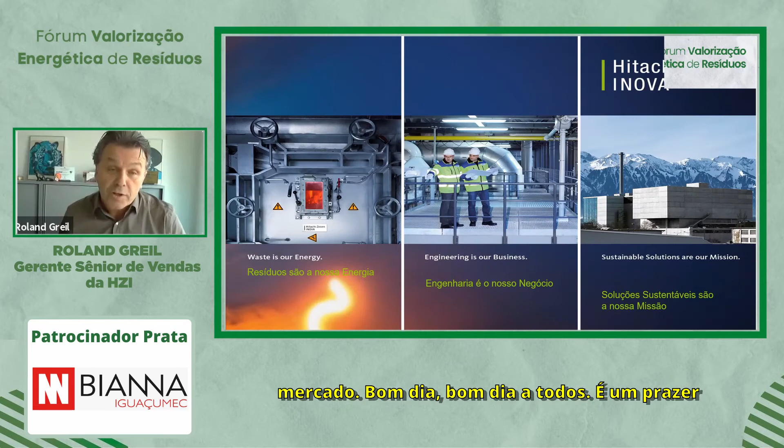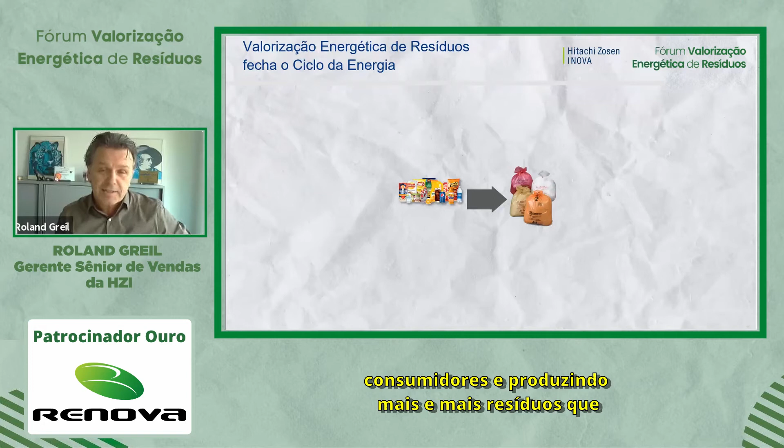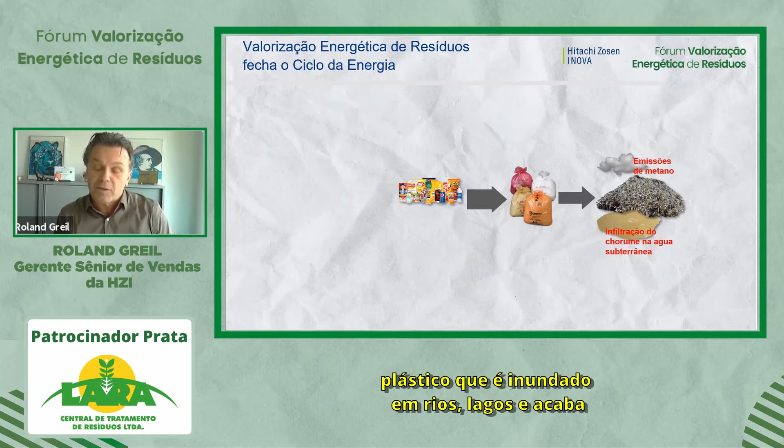I will talk about how we as HZI, Hitachi Zosen Inova, can contribute in the development of waste to energy in Brazil. We are all consumers and producing more and more waste that is polluting our environment, our drinking water, the air, plastic that is flooded into the rivers, lakes, and ends up in the ocean, and is also polluting our food. Raw material is used to produce those products and also to generate electricity.

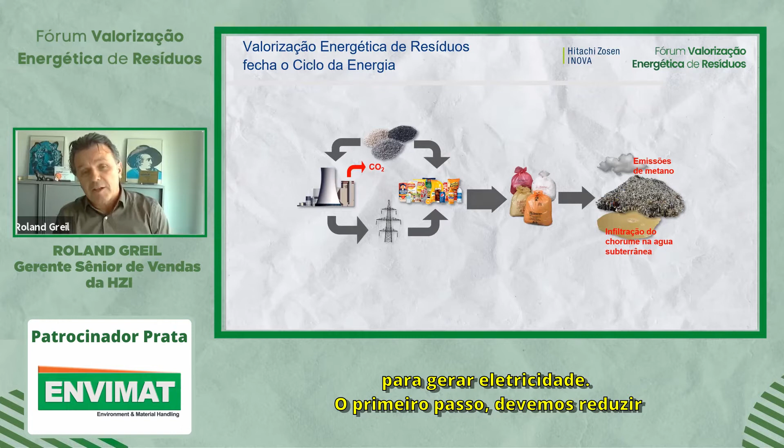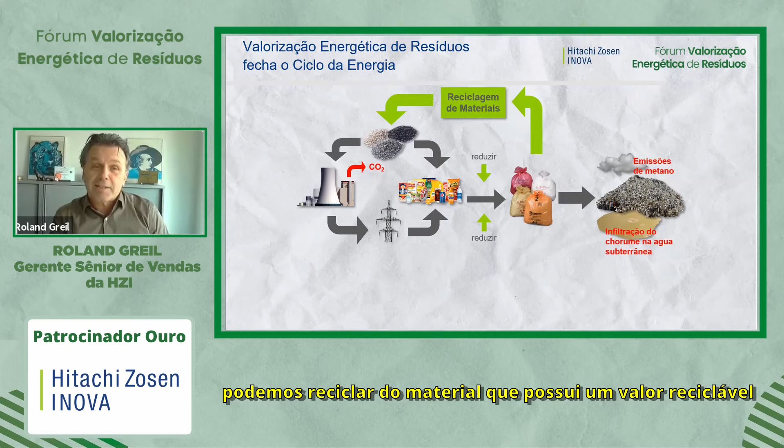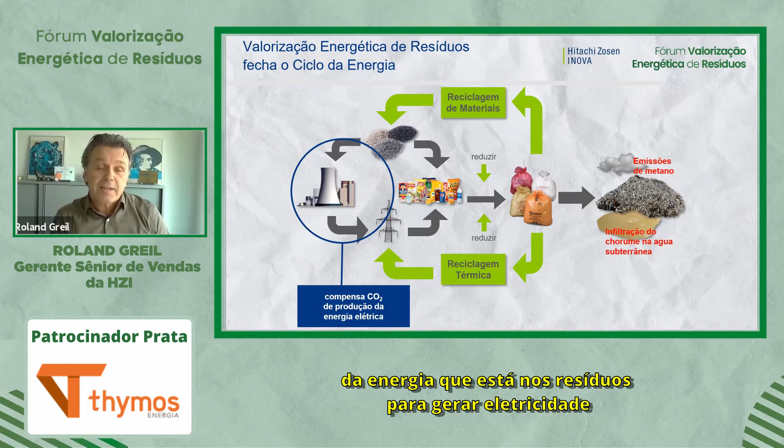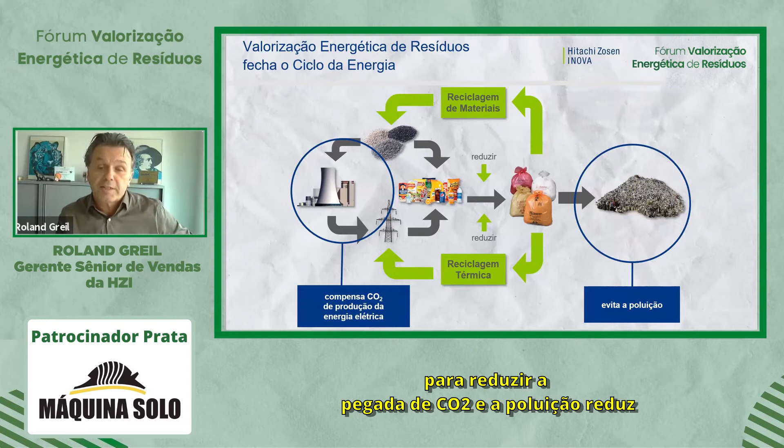In the first step, we should reduce the amount of waste that we are producing, and what we can recycle, material that has a value, shall be recycled and serve as a raw product to generate again electricity or produce the products. From what cannot be recycled, the energy shall be recovered, and that is the solution that we can provide to benefit from the energy that is in the waste to generate electricity, and to recover materials that cannot be recovered upfront from the waste. This helps to reduce CO2 footprint and reduces the pollution.

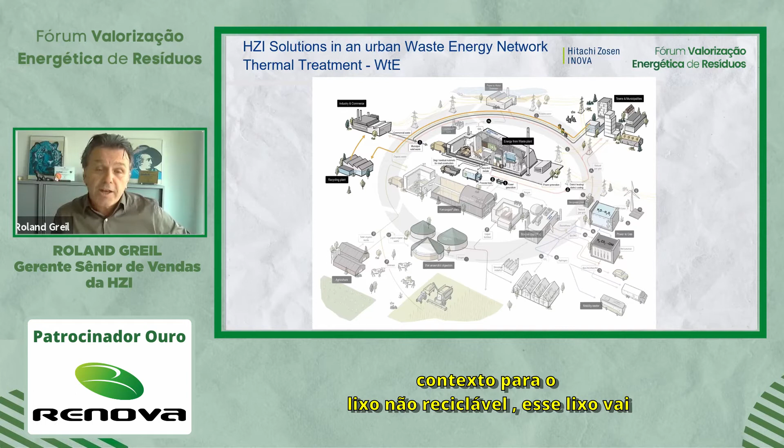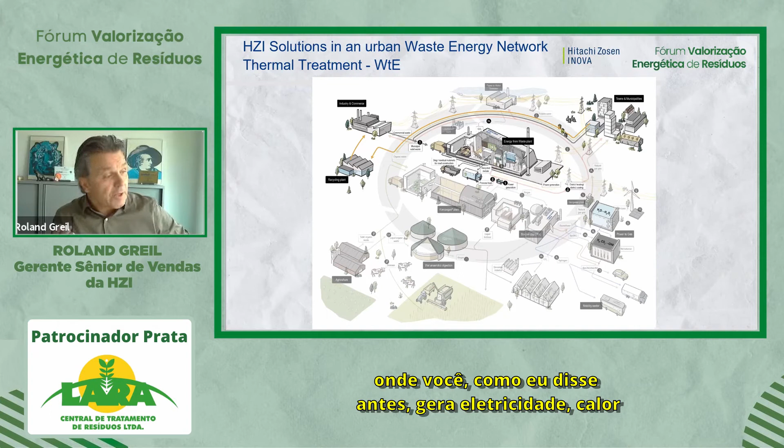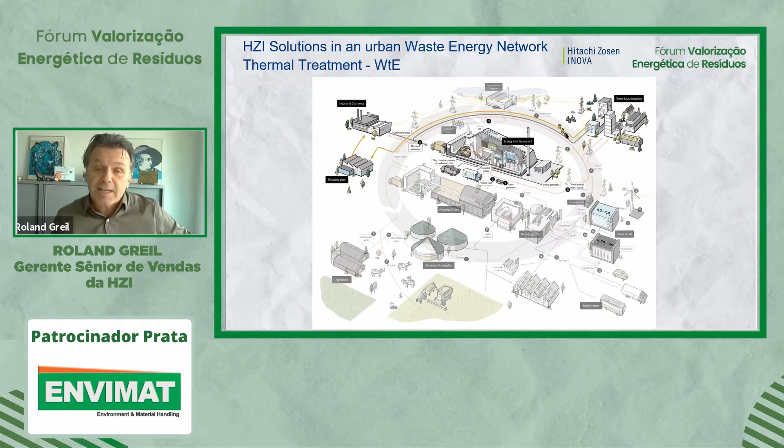What are HZI's solutions in this context? For the non-recyclable waste, this waste goes to waste to energy facilities, to the thermal treatment, where you, as I said before, generate electricity, heat or steam, process steam, or even cold, and recover materials that cannot be recovered upfront. Recyclable materials can go directly to the recycling industry.

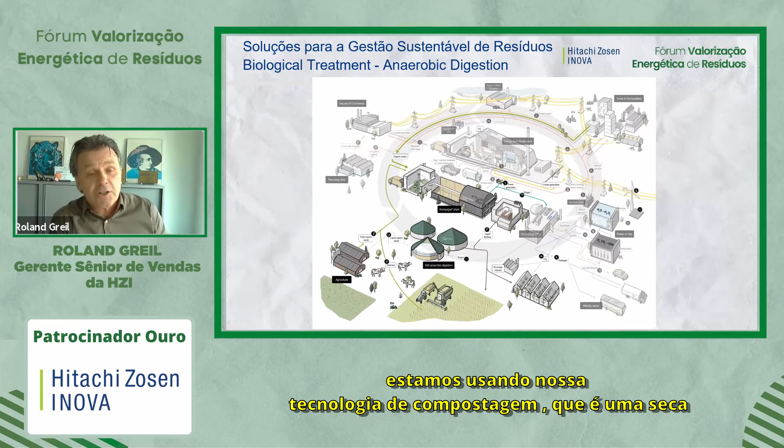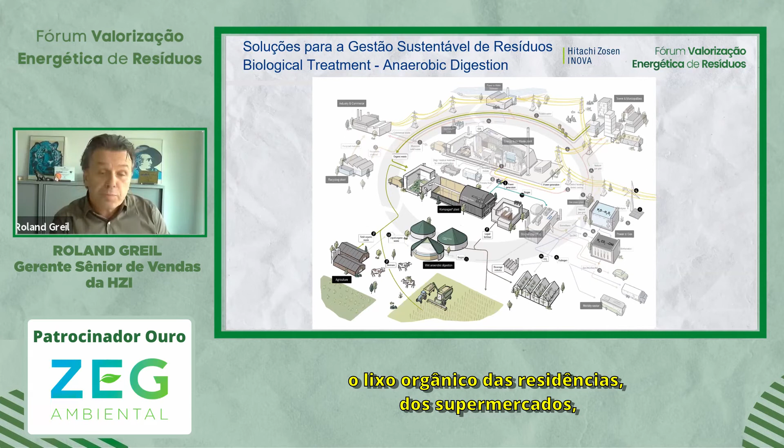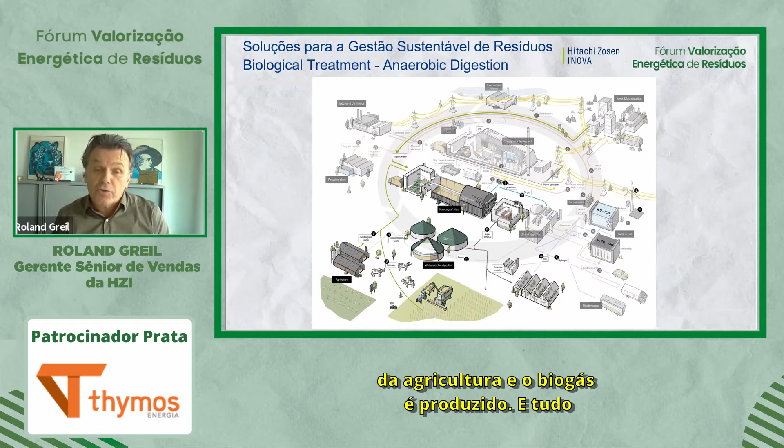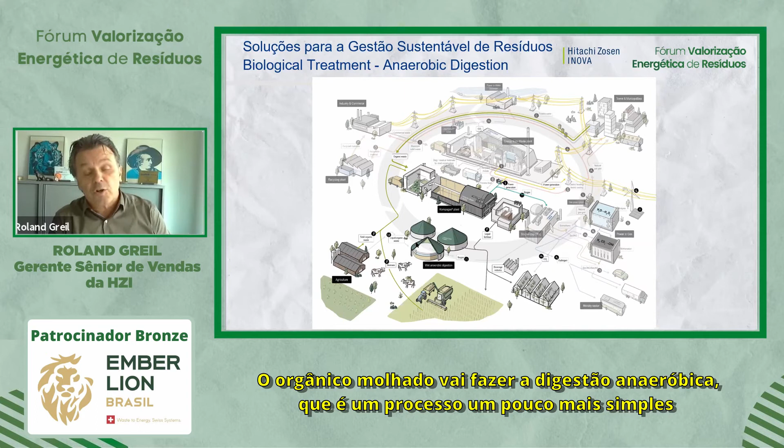For the organic waste, we are using our Kompogas technology, that is a dry anaerobic digestion. So where the green waste, the organic waste from households, from supermarkets, from markets, from the food industry is delivered, also from agriculture, biogas is produced, and also fertilizer, which then goes back to the agricultural industry, used in greenhouses or in gardening or in parks. Wet organic fraction is going to the wet anaerobic digestion, which is a bit more simple process actually.

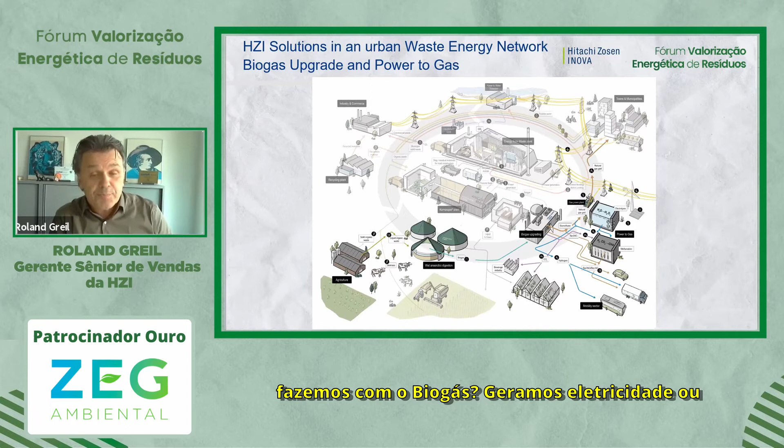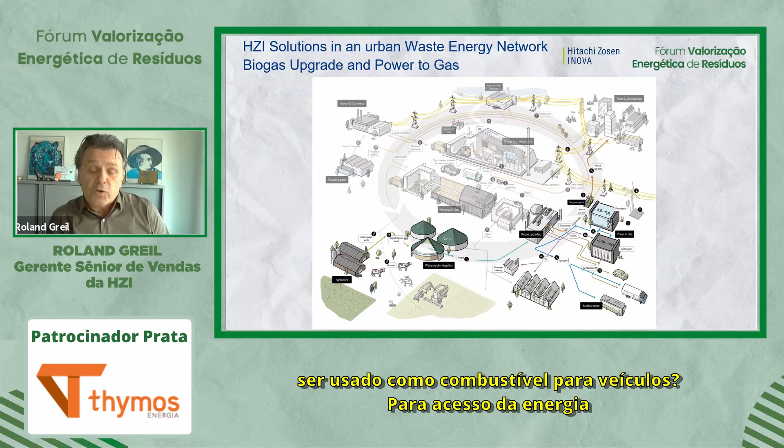What do we do with the biogas? We generate electricity as well, or we do the biogas upgrading to biomethane, which then can be used as a fuel for vehicles. And for the excess of energy that is produced from our plants or from other renewable sources, we use that in our power to gas solutions.

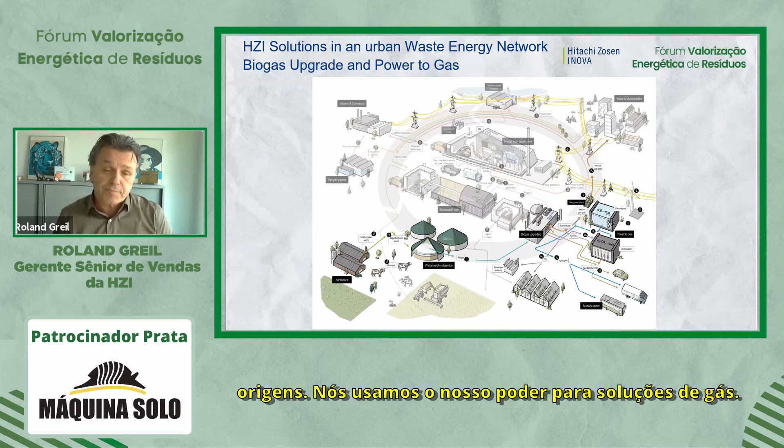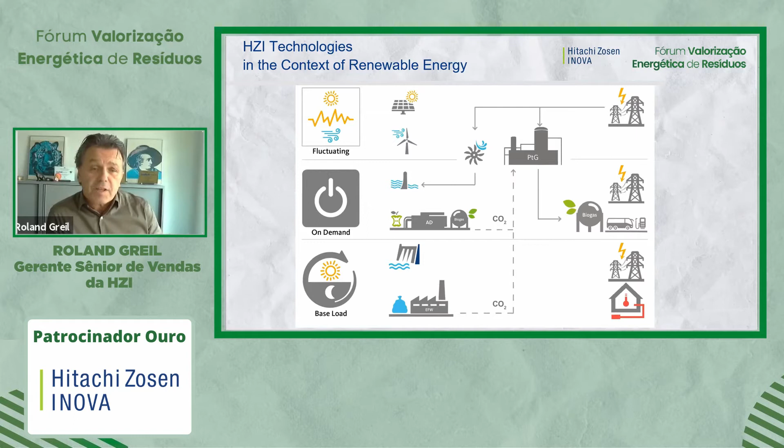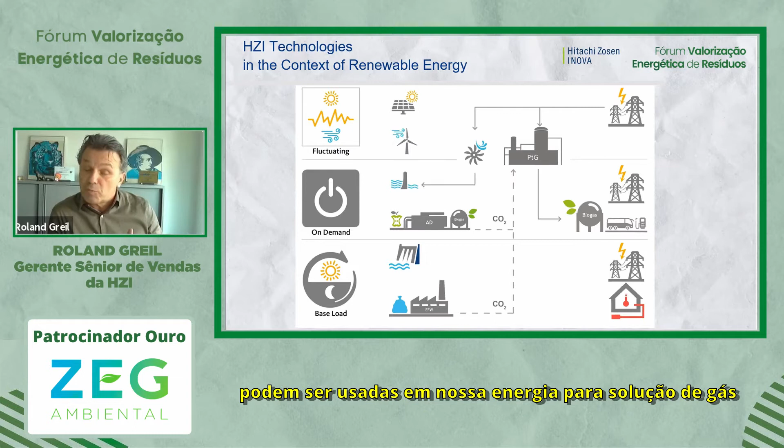What is the context of our solutions in renewable energy? So waste to energy is delivering the base load, constant production. AD, where you can store the gas, is an on-demand energy. And excess energy from fluctuating sources, renewable sources, can be used in our power to gas solutions to produce the gas, which can be stored and can be used when there is a demand.

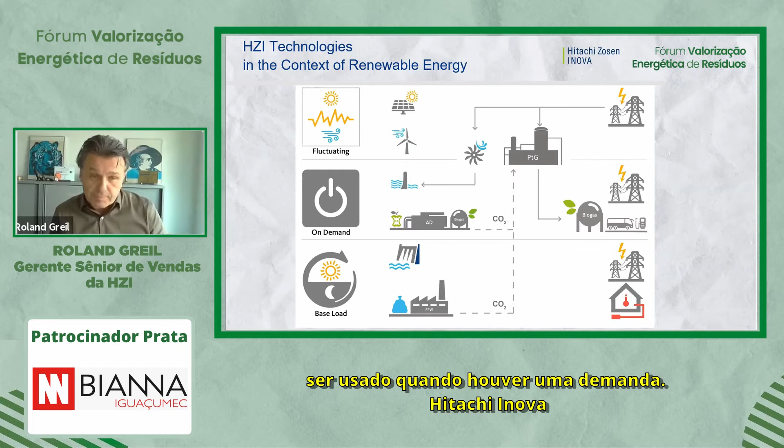Hitachi Zosen Inova is a company located in Switzerland. We have our headquarters here in Zurich. We are about 600 people here in Zurich, working for the solutions to deliver plants to our customers. We have other locations. In total, we are a bit more than 1,000 employees, and we belong since 10 years to our Japanese parent company, Hitachi Zosen Corporation, which used before our technology as a licensee to build plants in Japan and in other Asian markets.

As presented before, we have our proprietary technology for thermal treatment of solid wastes, anaerobic digestion of bio-waste, and biogas upgrade systems and power-to-gas systems. We don't only deliver and build plants, we also operate, maintain, and service the plants that we have delivered.

Our market share over the last 10 years was a bit above 27%. In the last years, even above 30% worldwide. That is both together, our parent company covering the Asian markets, and we basically covering the rest of the world. This is all counted on capacity installed.

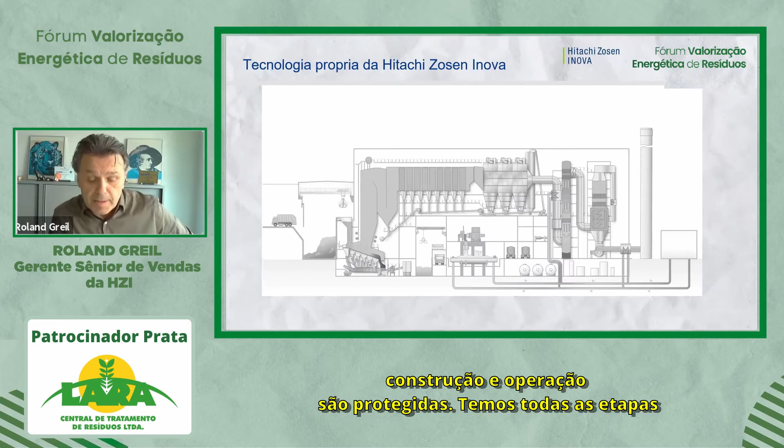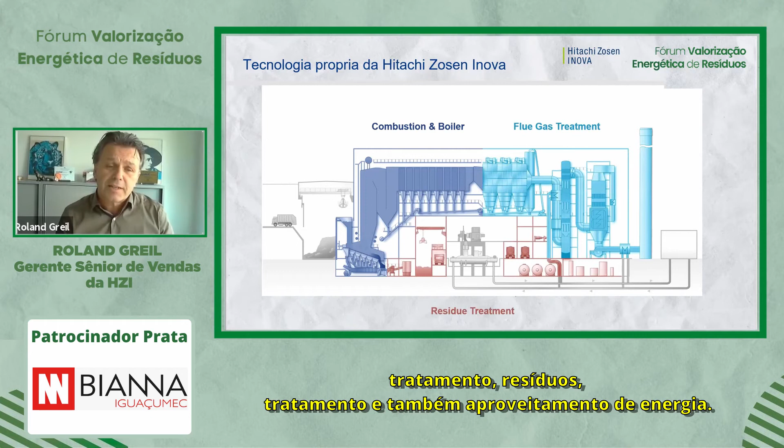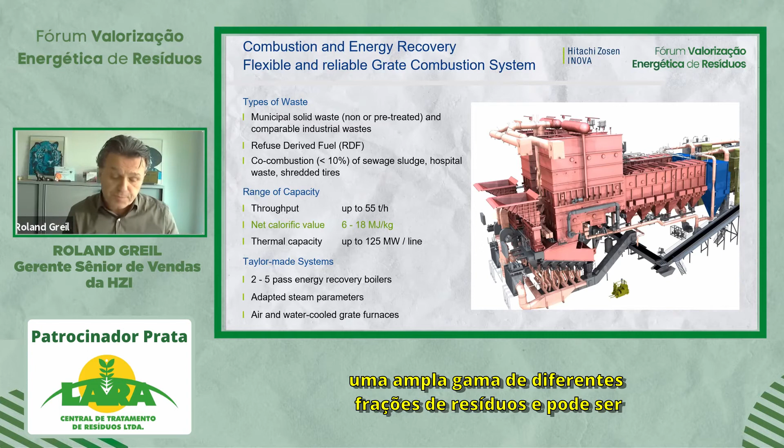We have all steps of the technology needed to build a complete plant. First section is the combustion boiler section, flue gas treatment, residue treatment, and also energy utilization. Our technology, and I focus today on waste to energy, not on the treatment of biological waste, on the treatment of the non-recyclable waste, is a grate combustion technology, which can take a wide range of different waste fractions and can be adapted to the local requirements and to local waste composition and specific situations.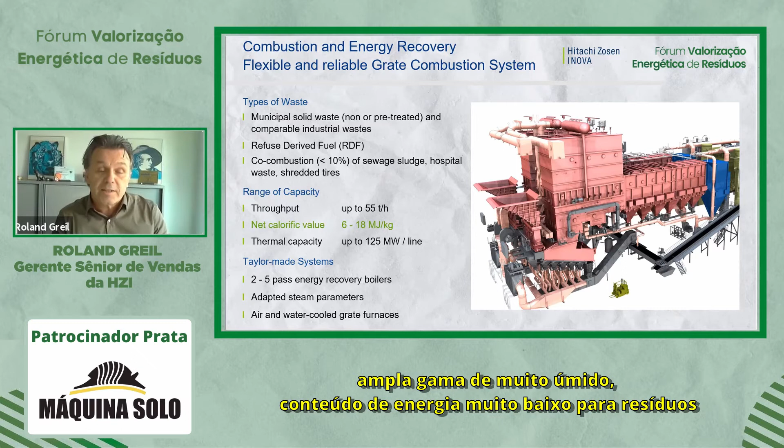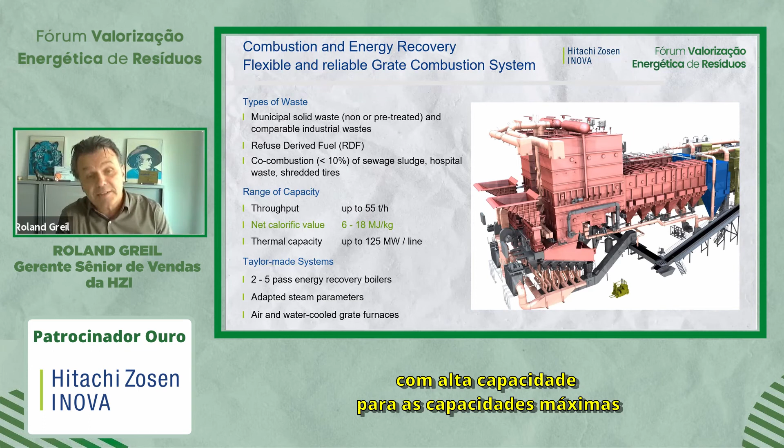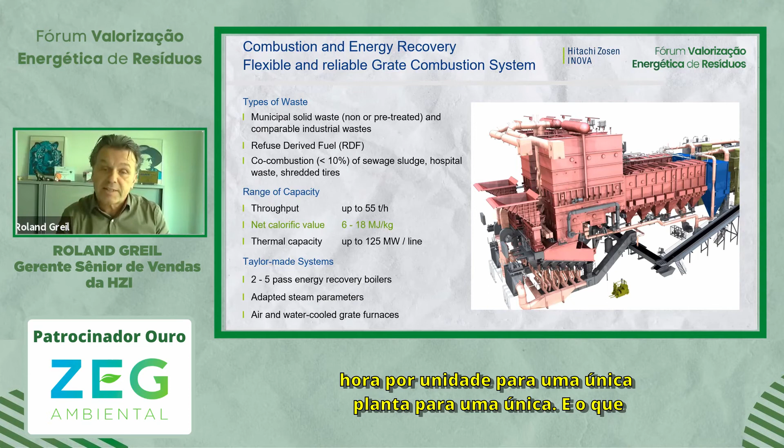You see here the range of net calorific heating values. This is a very wide range, from very wet waste with low energy content to waste with very high energy content. And we can deliver plants with high capacities. So the maximum capacities where we have executed projects is up to 55 tons per hour per unit for a single plant, for a single boiler, what you can see here on the picture. And the thermal capacity, that means fuel input, of 125 megawatts per line.

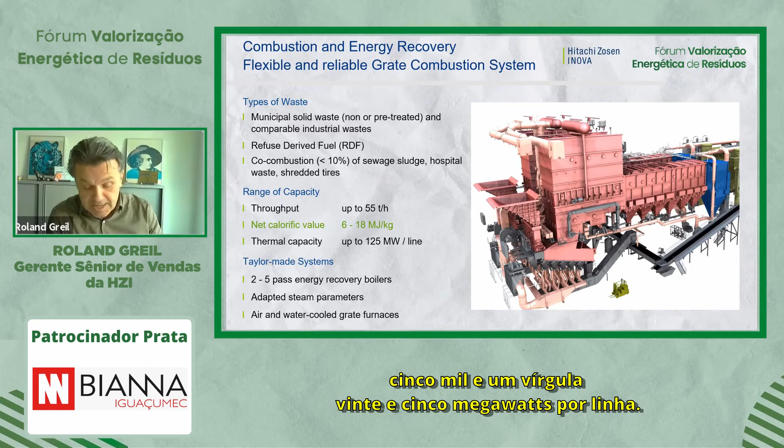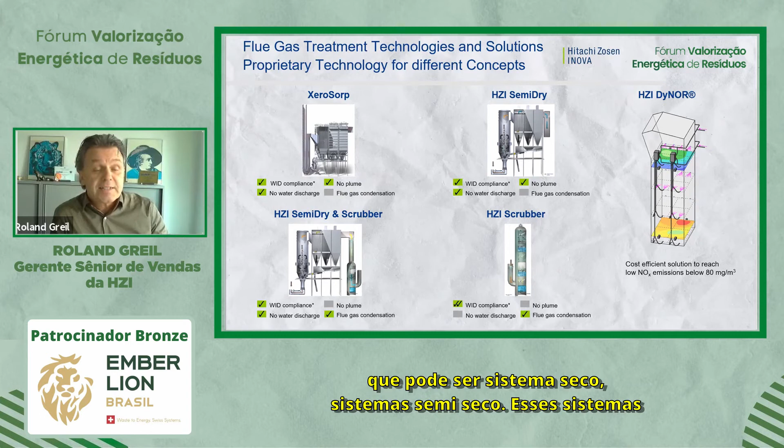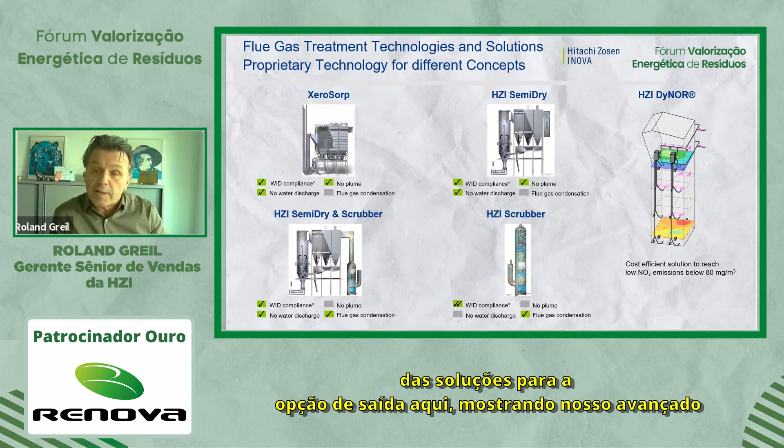We have also all kinds of flue gas treatment technologies, which can be dry systems, semi-dry systems, wet systems, or combinations of those systems, depending on the situation, the local requirements. And also solutions for NOx reduction. Here I'm showing our advanced DyNOR system, an advanced SNCR system that can reach very low NOx levels in a very simple way.

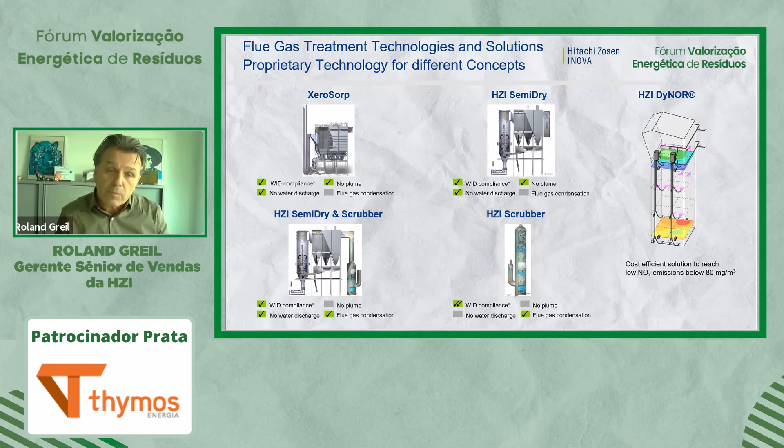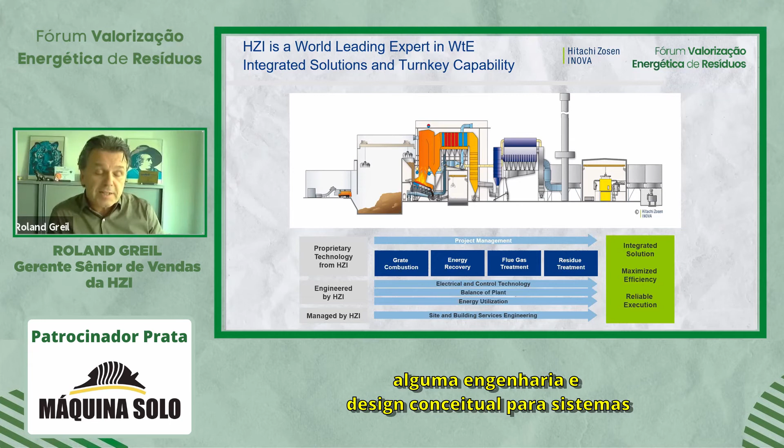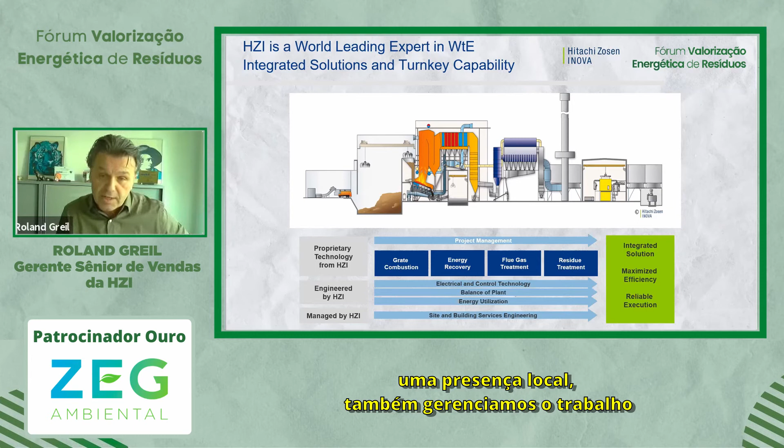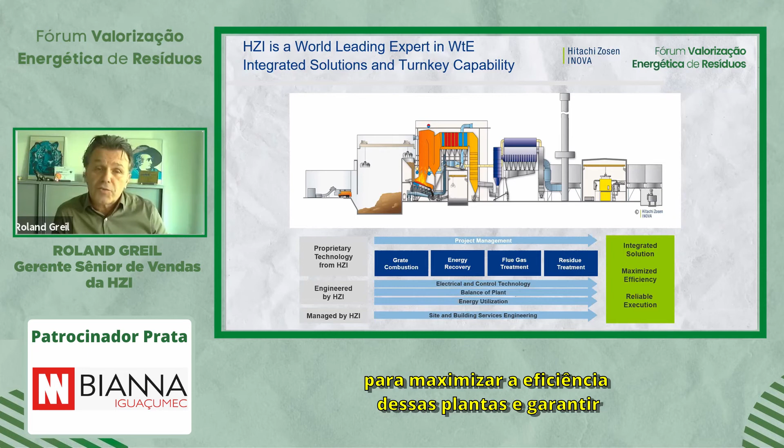We integrate the technologies that I've just presented, our proprietary technology, to deliver complete waste to energy facilities. And do some engineering and conceptual design for systems that are not our core technology, such as electrical installations, control system, balance of plant system, and a water steam cycle. And in markets where we have a local presence, we also manage civil work activities. Doing it in this way allows us to integrate those solutions in the best way, to maximize the efficiency of those plants and guarantee a reliable execution.

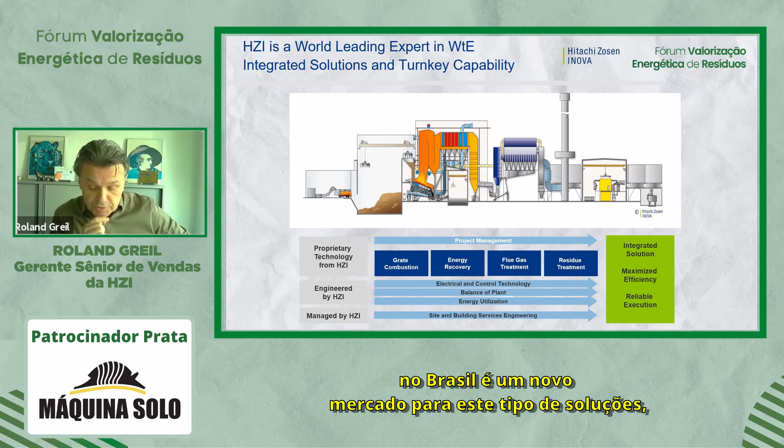This also means that in new markets, and Brazil is a new market for this kind of solutions, we typically team up with a local partner that has a strong local presence, good track record, and local experience.

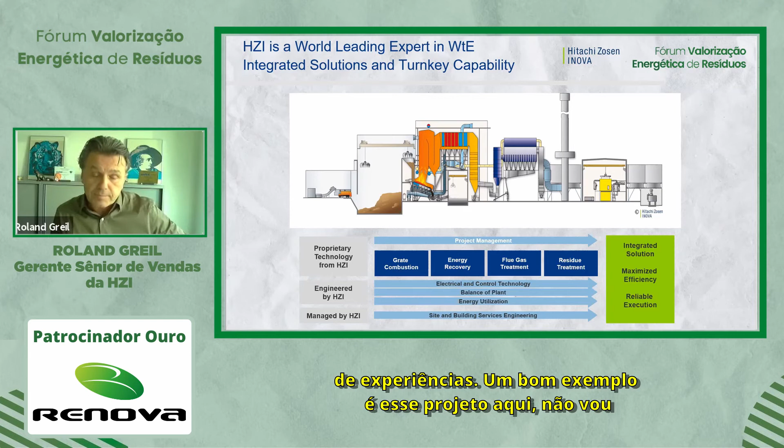A good example is this project here. I will not show the videos. You go to YouTube, search for Rookery South construction progress, and you will see the whole construction of this plant in four phases, in four videos, building up such a plant. It's quite a complex thing. You will see that, and it takes about 3 years to build such a plant. This is a plant in the UK, where we have been fully responsible for the full EPC turnkey wrap.

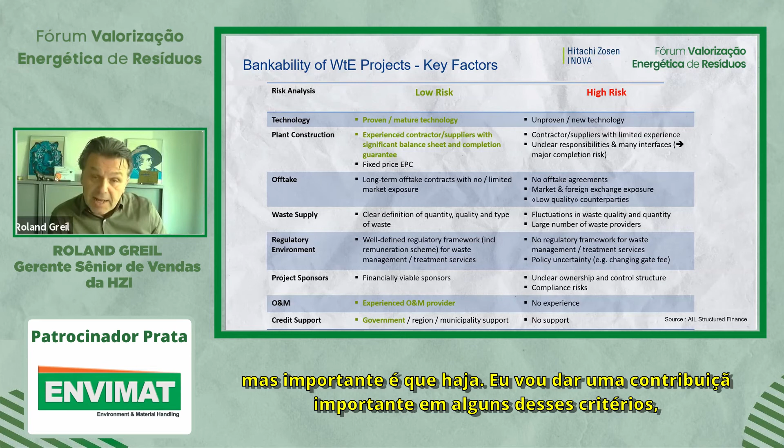A very important aspect is the financing, of course, of this kind of projects. I've listed some key factors on this slide. I do not go into the details, but important is that for some of these criteria, we make an important contribution. We deliver proven, mature technology, which is the grate combustion. We are an experienced contractor. You can see our references on our homepage. Only in the UK, we have built in the last years 14 waste to energy plants.

We have a strong financial background, supported by our Japanese parent company, Hitachi Zosen Corporation. We have O&M experience, so we can provide also O&M support. And we might be able to get some governmental support from the Swiss Export Credit Agency, which is SERV, to facilitate the financing of these projects.

Over the last years, Europe was our home base, so most projects have been built in Europe. As I mentioned before, the UK was by far the biggest market over the last 10 years. Worldwide, it was China, where most of the plants are built on licenses from European companies such as us. But for some plants, especially the big ones, we are delivering the combustion grates out of Europe to these plants in China. I will now show you some of our projects in new markets: in Turkey, in Australia, in Russia, and in the Middle East.

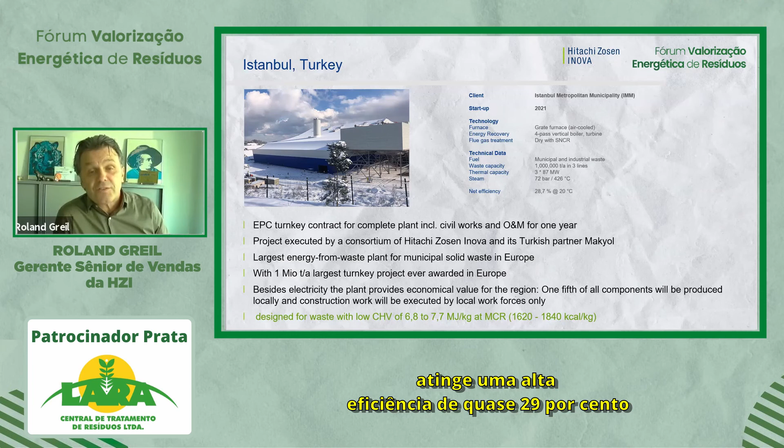One of them is this plant here. It's in Istanbul, Turkey. It's the biggest plant in Europe. It's just in commissioning; we started to thermally treat the waste at the beginning of March. This plant is designed for waste with quite a low heating value. You see the numbers here, which is about what you can expect from the waste that would have to be treated in Brazilian facilities. Nevertheless, this plant reaches a high efficiency of almost 29% at an ambient temperature of 20 degrees. We execute this project, as mentioned before, in cooperation with a local Turkish partner, which is responsible mainly for the civil works activities. And together, we are responsible for the erection of the equipment that we deliver to this plant.

Another project, or actually 4 projects, are around Moscow. So we have 4 plants around Moscow. Waste is delivered via transfer stations to one of these facilities. Three of these plants are in construction already. The driver here was the strategic decision by the Russian government to have a certain amount of energy produced by renewable energy sources. In this project, we deliver the key technology, our process technology and key equipment, to local partners, which then erect the plant and are responsible for the installation and commissioning of that plant.

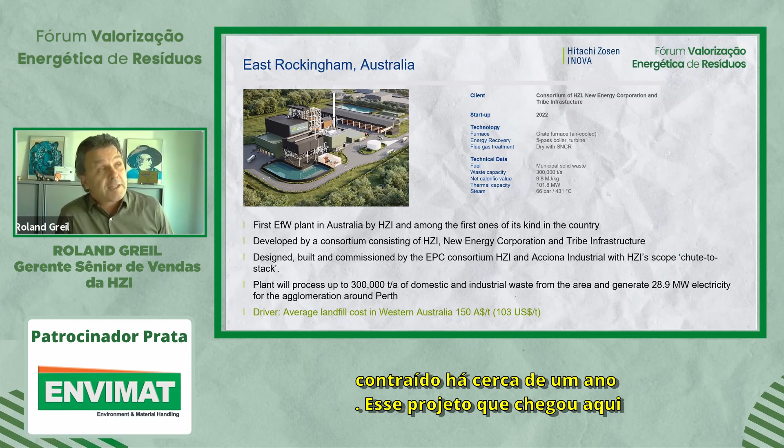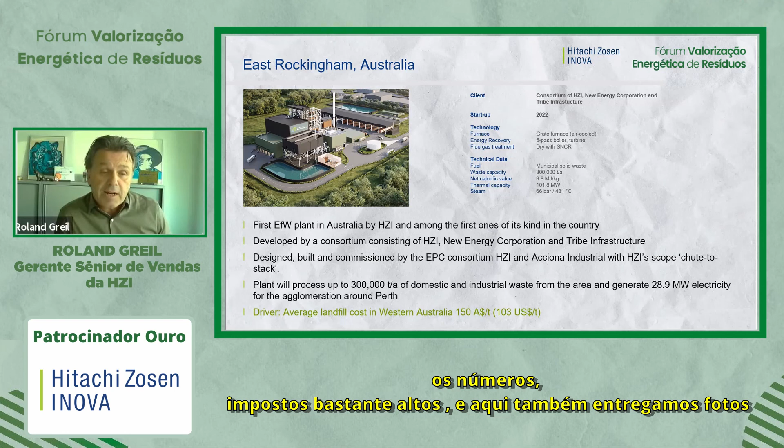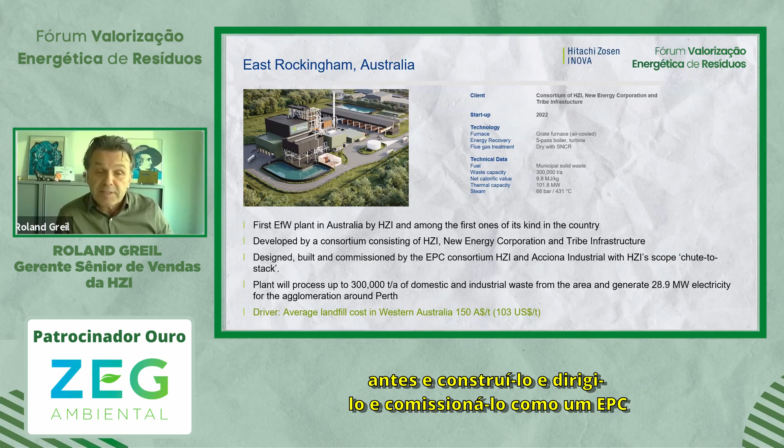Another project is our first project in Australia, which we contracted about a year ago. The driver here was increasing landfill costs due to taxes. You see the numbers, quite high taxes. Here also we deliver chute-to-stack equipment, so the main process that I've presented before, and build it, erect it and commission it as an EPC consortium with joint responsibilities with a partner that has a local track record and a strong local background.

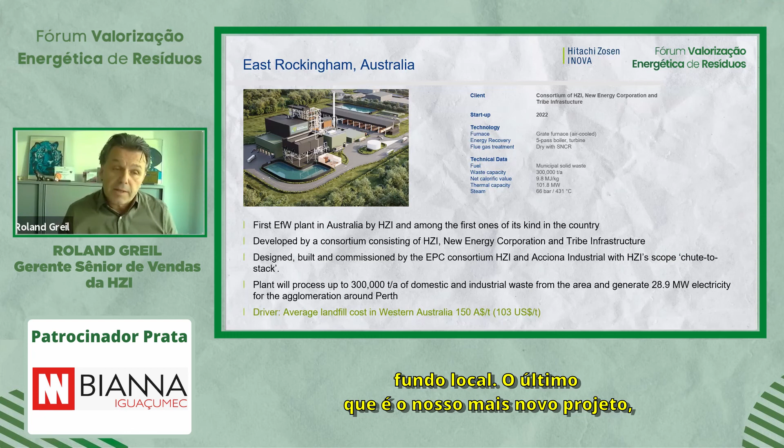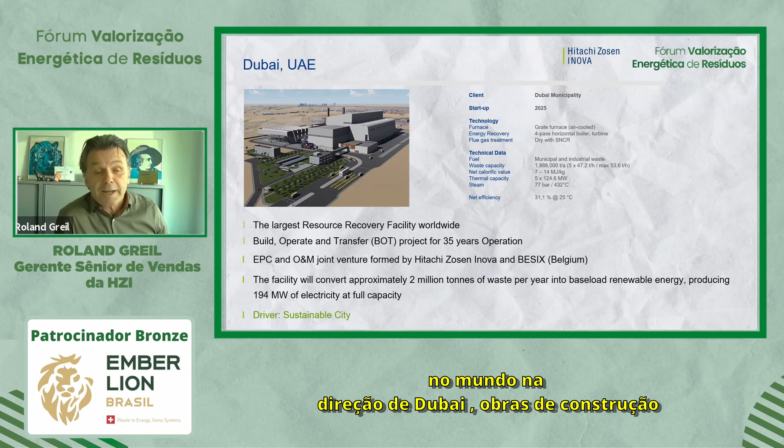The last one is our newest project. It will be the biggest waste-to-energy plant in the world, in Dubai. The construction work, meaning excavation, foundation and concrete pouring, started about half a year ago. It is the biggest plant contracted as a single contract, with a capacity of up to 2 million tons per year, consisting of 5 units. And we, together with a partner which again has a strong local track record, are jointly responsible to build and operate this plant for 35 years.

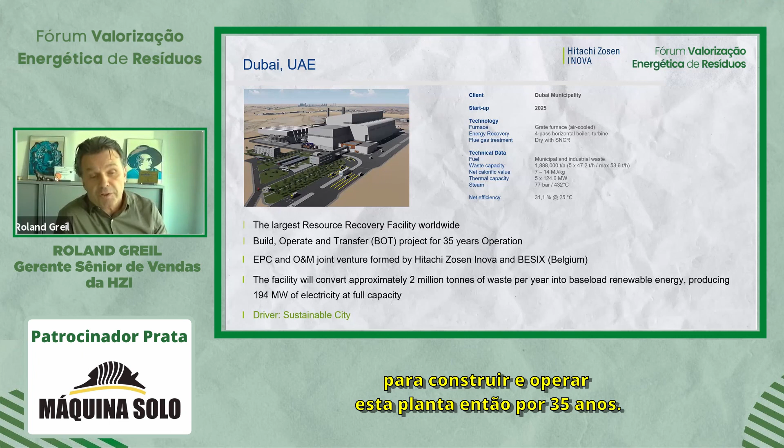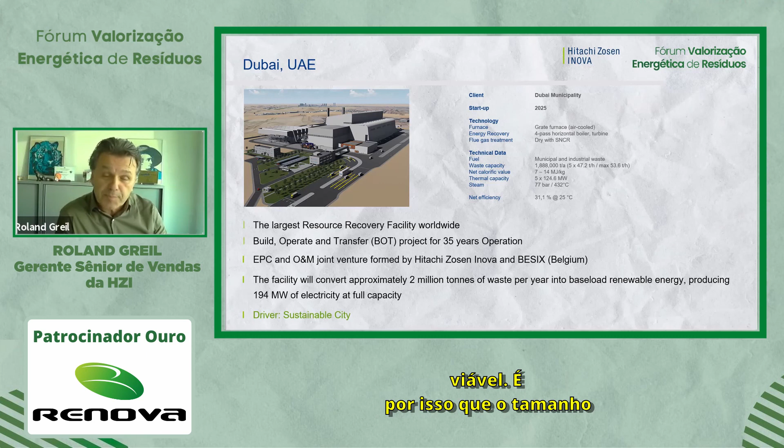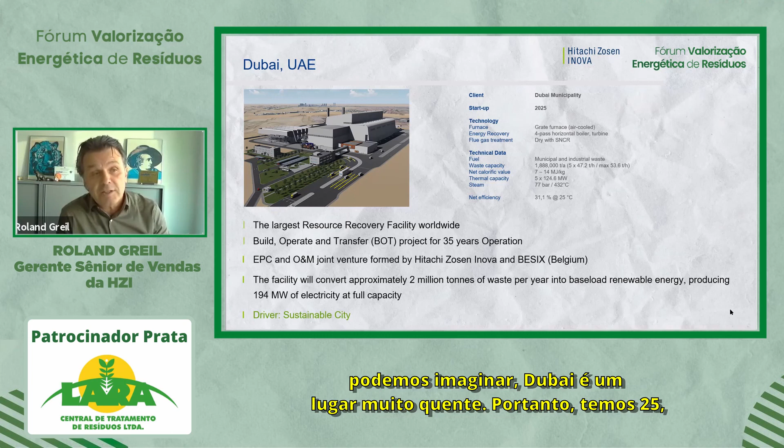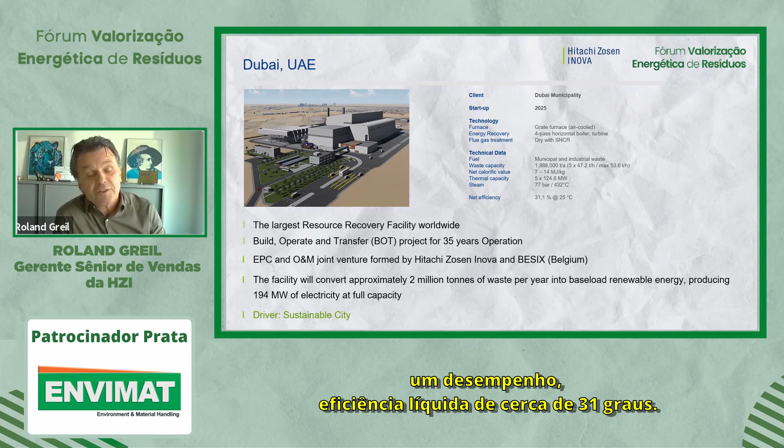Very important in this project was the economies of scale. This was very important to make the project feasible, so the size of it is really relevant. And of course also the performance. You can imagine Dubai is a very hot place. So at 25 degrees ambient temperature, we have a net efficiency of above 31%.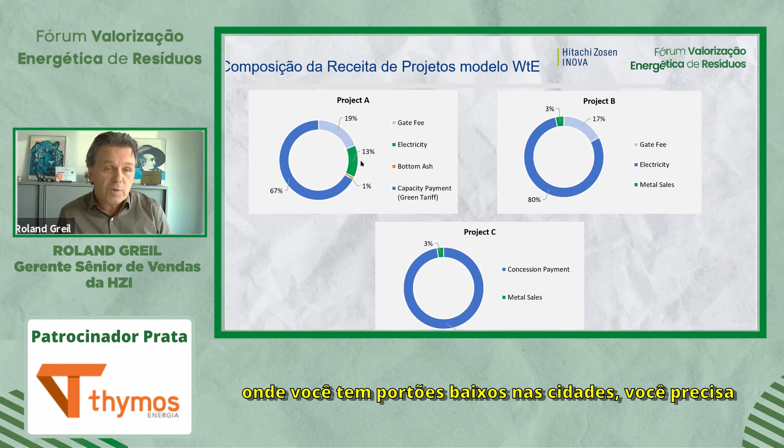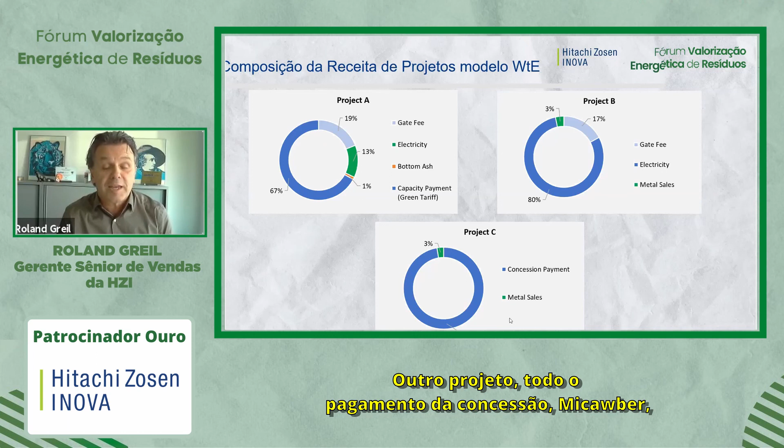I won't go into detail here, but the drivers and enablers for this kind of project can be various. It can be a landfill tax that is increasing, it can be a landfill ban, it can be grants, subsidies from governments, and also some governmental support. As I mentioned, ECA-covered financing is sometimes also very beneficial to make the financing possible. This leads to quite different revenue models. In places where you have a low gate fee and low electricity tariff, you need a big subsidy. In other places with a good electricity tariff, the income comes from electricity. In Europe, it's the other way around: typically, 2/3 of the revenues come from the gate fee. In another project, the whole concession payment might cover the service and the energy production.